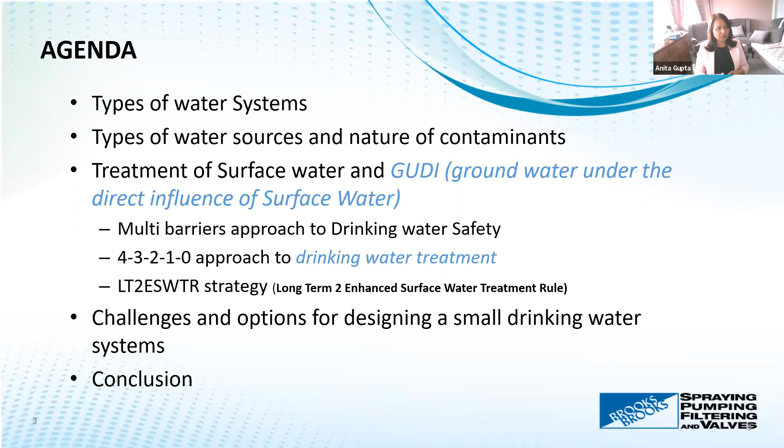And this long word, LT2ESWTR, the full form is Long Term 2 Enhanced Surface Water Treatment Rule. Canada has adopted that from US EPA guidelines. And then of course, we'll talk about what challenges we run into when we're designing a small drinking water system. And at the end, as Paul promised, there will be questions and answers.

Now, looking at the type of water systems. This definition of water system could be different depending on what municipality, what jurisdiction you are in, but following are the broad categories of different water systems based on size. And this is the definition by our federal government for First Nations communities.

A large system is a system that serves over 5,000 people, so it's a large city. A small system is about 500 to 5,000 people. That's called a small system. Very small system is when you're looking at 26 to 500 people, and then 25 or fewer people is a microsystem. Irrespective of the size of the system, the water quality expectations are the same. Safe drinking water quality.

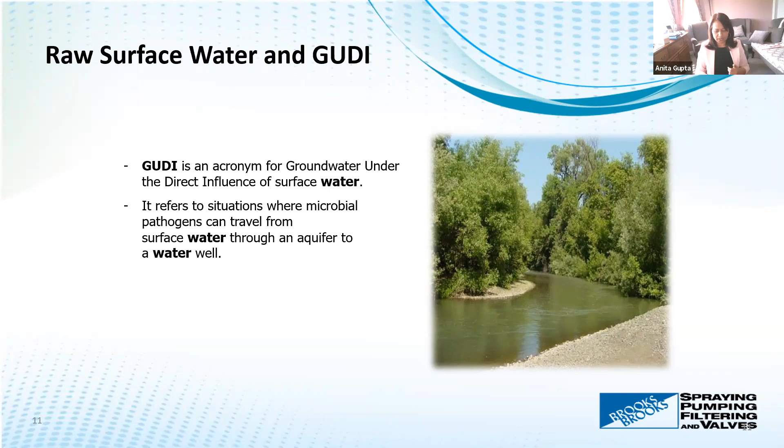So the new term was groundwater under the direct influence. A groundwater that has an influence of surface water will have some characteristics of surface water as well as groundwater. So let's take a look at it. What are those contaminants in there? A raw water and a groundwater under the direct influence.

So what will be a typical water analysis? Or I should say what we will be looking for when we are designing a small treatment plant using surface water. We will be looking at what the incoming turbidity is, what the total suspended solids, TSS load is. We know that if it's truly a surface water, dissolved solids will be relatively less, about 300 to 1,000 parts per million, because the dissolved solids are pretty high in groundwater, in well water.

That's where you get the high calcium, the water hardness. That gives you all those dissolved, high chlorides, high sodiums. That causes your dissolved solids. Same way in surface water, the hardness will be moderate and low level of iron and manganese. We know that the iron and manganese issue is more in the well water, in the groundwater.

The biggest issue with any surface water is going to be high organic content. Total organic carbon, TOC. Dissolved organic carbon, that's one of the biggest challenges that we run into when your water intake source is surface water. And now what are the challenges with GUDI water, which is groundwater under the direct influence? The TSS level will be relatively low because you're mainly getting the water from the ground.

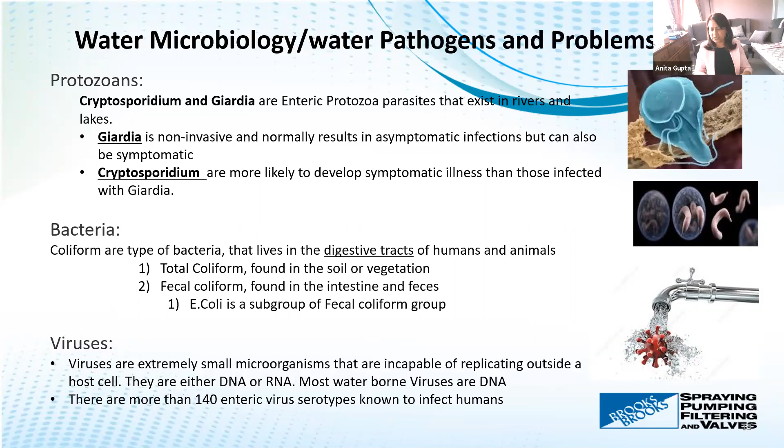Okay, so what are the symptoms of crypto and Giardia, which are protozoans? What are the symptoms if the infection is because of the coliform, and the symptoms of viruses? Now, crypto and Giardia have very similar symptoms: nausea, diarrhea, low-grade fever, uneasiness. Coliform, again, the diarrhea, abdominal cramp. These are very typical symptoms.

Same thing with viruses. If the viruses are not removed, they get into our digestive system, in our intestine. It could cause gastrointestinal illness. And in serious cases, it will actually cause diseases like meningitis and polio. Right?

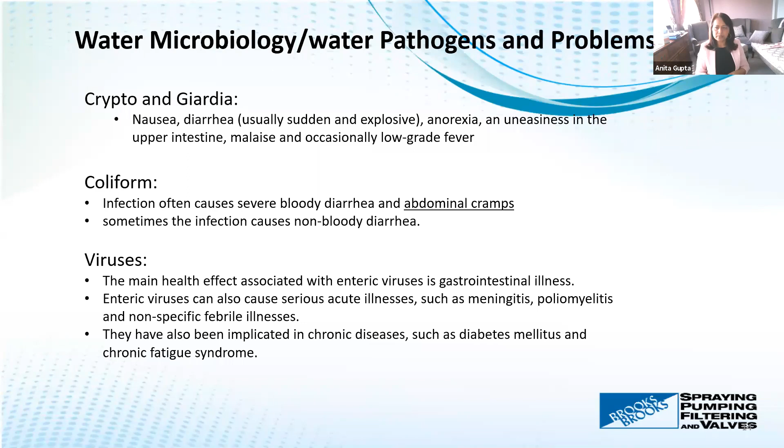Now, getting to how we're making the safe water. Before we get into the treatment, let's look at the water safety approach, which is adopted across North America, and actually the World Health Organization also recommends this approach. It's called the multi-barrier approach. What is a multi-barrier approach?

It's not just that treatment has to be robust. We need to first protect the water source. If we have picked Lake Ontario or the Columbia River in BC or somewhere where we're taking the water, we have to protect that. We can't keep continuously adding more contaminants to it. That means your water quality will keep changing. And then, of course, the robust water treatment system design is important.

At the same time, in the multi-barrier approach, it's important that we do continuous inspection, right? That means we need to continue to inspect: is the turbidity level that's coming out good for human consumption? All the viruses and bacteria, are they up to the level of the quality of drinking water? Continuous testing is important. A distribution system has to be robust. There are guidelines for how much residual chlorine or disinfectant needs to be there. So a multi-barrier approach is another guideline to make sure we design a robust water treatment system and maintain it.

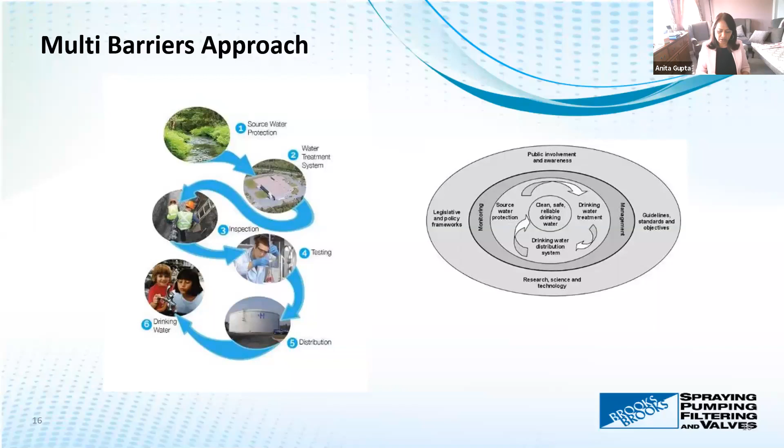Again, the same thing I talked about in the previous slide: we need to protect the source. We need to design a robust water treatment system. We have to secure a good water supply network, and a monitoring program for water quality so that it can be adjusted, right? And always be prepared if some adverse conditions come up.

This big word again, Long Term 2 Enhanced Surface Water Treatment Rule. This has been adopted from EPA guidelines. What is it? This was adopted to give guidelines for pathogen reduction. So which pathogens? Mainly, it addresses the health effects of Cryptosporidium in surface water systems when used for drinking water.

So the guidelines are, before we say this water is good for treatment, or what type of treatment needs to be advised, we need to collect the water sample, right? We need to test it for crypto. We need to test it for E. coli, and then design a disinfection and treatment system to make sure it meets the benchmark. The Canadian Drinking Water Agency adopts these guidelines, and I would say most municipalities across Canada go by these strategies.

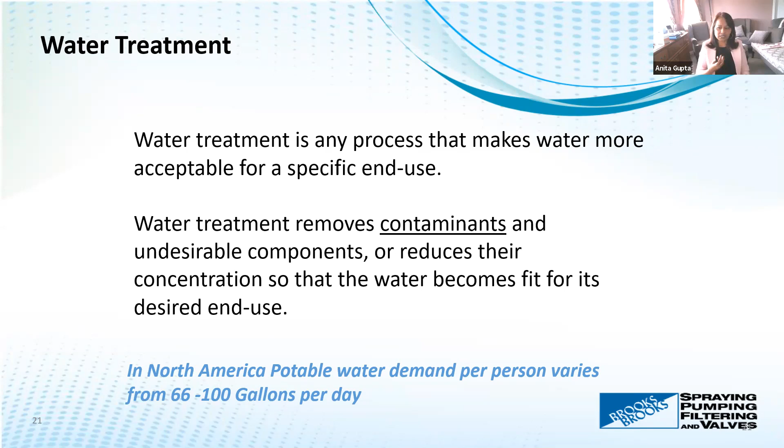Now, what's the best approach to treatment? It's like a formula, you can consider it: the 4-3-2-1-0 formula. Think about it when designing a potable water system. What does 4 mean? The 4 means viruses need to be reduced or deactivated. Whatever viruses come into the surface water, by the time this water is called drinking water, it should have 99.99% reduction of viruses. That gives a 4 log reduction or 4 log credit.

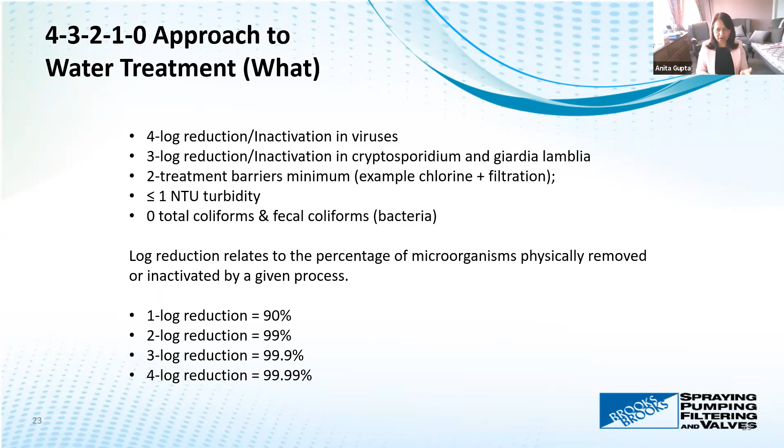Crypto and Giardia down to 3 log credit. And 2 means a system should have 2 treatments minimum. When I say treatment, one treatment can be a filter, the other can be chlorine. And the turbidity of the treated, filtered water, the water you're calling potable, has to be less than 1 NTU. When it comes to coliform, zero, absolutely no coliform should be there. Remember, coliform is bacteria. Viruses are the smallest microorganisms, and Crypto and Giardia are protozoans.

Now, what are the different approaches? How can you get 4-log reduction? You can get it by using filtration and disinfection. For filtration, there are guidelines. The filter needs to be NSF 61, or NSF 53 if it's point of use. The filter should have a log credit certification. A filter can be cartridge type, multimedia sand filters, or ultrafiltration. And for disinfection, you could use chlorination, UV, or chlorination and UV.

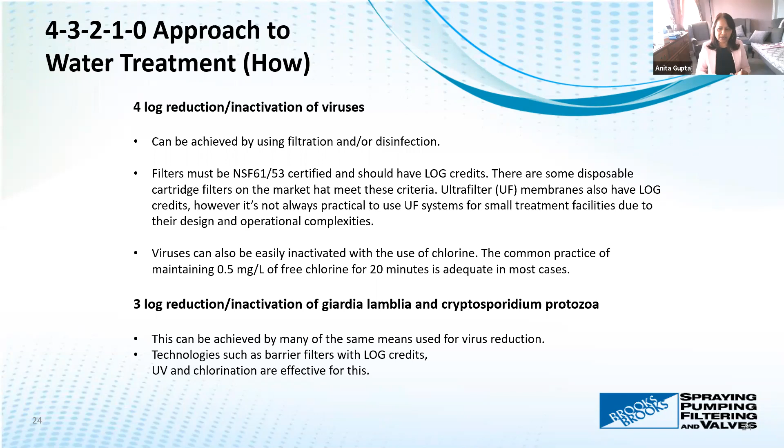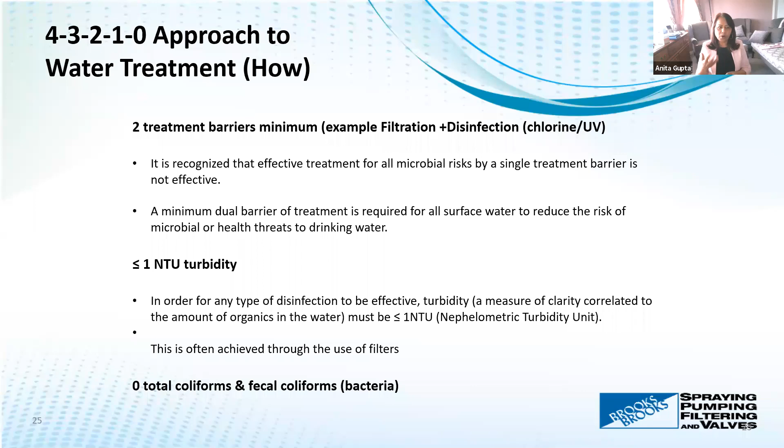We'll go into a bit more detail in the next couple of slides. There are guidelines on what the residual chlorine level needs to be and how long this residual has to be there. Same thing for 3-log reduction for Giardia and Crypto: you could achieve that by disinfection as well as filtration. 2 treatment barriers, simple. 1 NTU turbidity: barrier filters. A filter is the only, I would say, foolproof way to make sure the turbidity is less than 1, unless the incoming water already has less than 1 NTU, which is very rare if you're using surface water from a lake, river, pond, or groundwater.

Now, we can use filters, we can use disinfection. What challenges do we run into when designing? Many challenges. The very first one is source water quality data. We have river water coming in. Do we have reliable water quality data? Do we know exactly what TSS, total suspended solids, or turbidity will be there throughout the year? We know it's going to change depending on rain and the time of year, same with how much TOC will be there. All that data needs to be very reliable. That's why it's important to do testing multiple times a year.

But at the end, we need to meet the treated water guidelines. That means turbidity needs to be less than 1. With the existing treatment, if any, TOC needs to be brought down to 3 to 5. Color needs to be brought down to 3 to 5 ppm. And if it's groundwater under the influence, we have to make sure iron is brought down to 0.3 ppm or less and manganese to 0.05 ppm or less.

Before we get into barrier filters, since we're talking about surface water or groundwater under the influence, let's look at pre-treatment. If you have high TOC, we need pre-treatment, because otherwise it's going to cause havoc for the downstream filters and disinfection. TOC, organic carbon, or slime-producing bacteria are common issues upstream. Chlorination and enhanced coagulation and flocculation are different ways to deal with it.

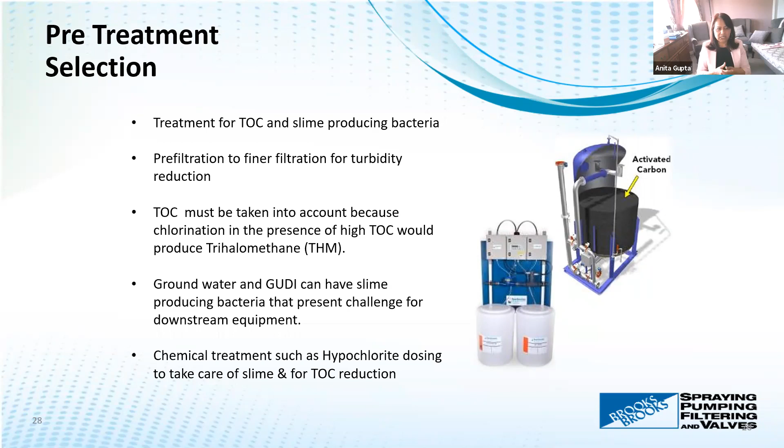We have to be very careful if we add chlorine in the presence of TOC. If the organics are not taken care of, the chlorine will react with them and produce disinfection byproducts such as trihalomethanes, which are carcinogenic. So all that needs to be thought about and taken care of before we get into filtration and final disinfection.

Another type of pre-treatment or pre-filtration need is a coarse filter you might want to put in so that your final barrier filter, which gives you less than 1 NTU, is protected, and you're not constantly changing your filter media, filter cartridges, or membranes.

Now, final barrier filters. Final barrier filters, especially when it comes to small treatment plants, could be a cartridge, or it could be membranes. It could also be pressurized sand filters, multimedia filters. But the bottom line is this filter should be able to give us less than 1 NTU of turbidity.

So the guidelines say your filter needs to be 1 micron absolute. More importantly, it's important that the filter is 1 micron absolute and membrane filters. The difference between a regular 1 micron absolute filter and membrane is the membranes have the credit for microbial reduction, and a regular 1 micron absolute filter is certified only for particle reduction. So just a minor difference in there.

When it comes to water filtration, drinking water, I would stick more with the 1 micron membrane filters. But for even finer filtration, there are the ultrafiltration membranes. But at the end, it needs to meet NSF 61/53 certification.

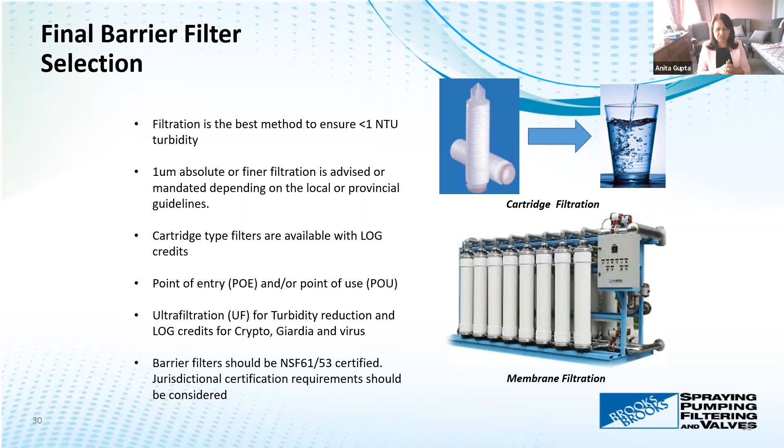Cartridge type filters. There are so many different cartridge type filters. But when we're designing a system using cartridge type filters, we're going to be aware of what type of challenges we may run into, what are the limitations of cartridge type filters. We know that it's going to get plugged. Once it's all full with dirt, we need to change it, throw it out, and put a new one. That could be challenging, depending on who's operating the plant. What are the plant requirements, right?

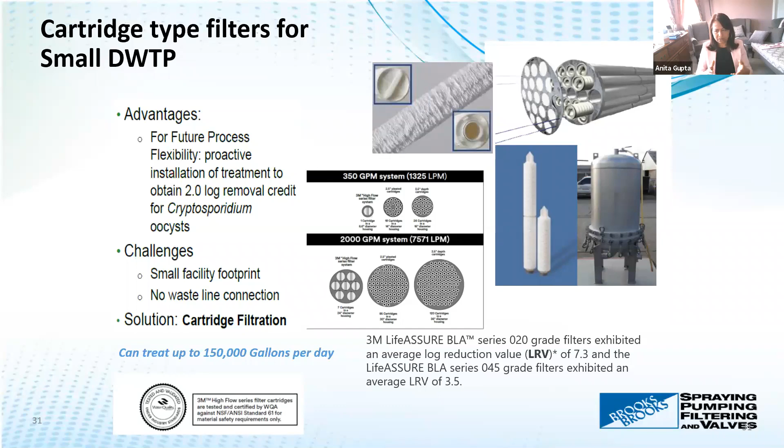And also, not all cartridge filters have the log credit. You may not get any credit for reduction of crypto and Giardia or any viruses or bacteria. These are some examples of cartridges out there which have some log credit associated. 3M LifeAssure BLA model, 0.2 grade has the log credit associated. And same way, they have 1 micron high flow cartridges, which are NSF 61 certified. However, it does not have any log credit associated with it. Just that option is out there.

A separate seminar could be done on how to design a system with ultrafiltration. And of course, we don't have time today to talk about that. But next time, if anybody's interested, I'll be more than happy to talk about it.

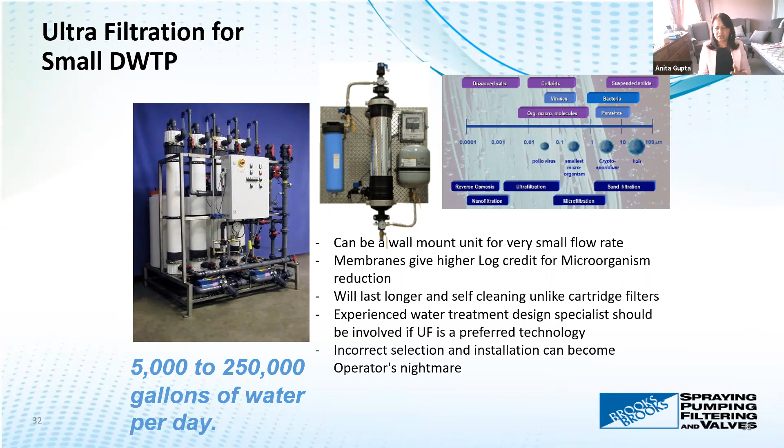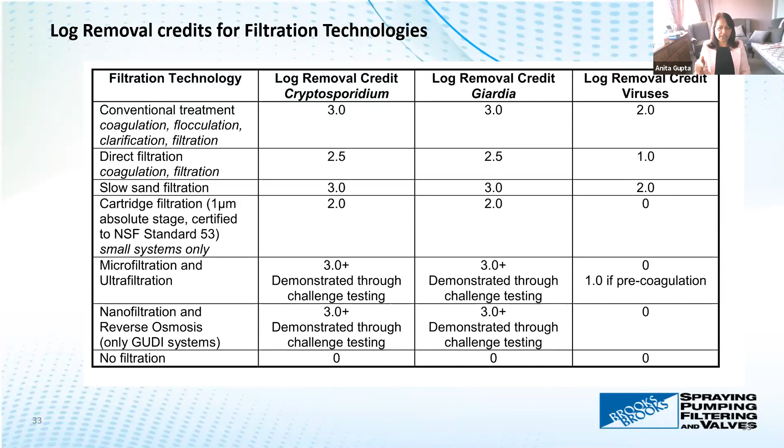Now, we've been talking about the credits and log removals. The Canadian Drinking Water Guidelines say that if you're using conventional treatment with coagulation, flocculation, and then filtration, you get 3 log credit for Cryptosporidium, 3 for Giardia, but only 2 for viruses. And if you remember, we need to get to 4 log credit for viruses, 3 for crypto and Giardia. So with ultrafiltration, we get 3+ for crypto, 3+ for Giardia. If pre-coagulated, you get 0, you get 1. Otherwise, you've got to have some other disinfection to make sure you get virus removal.

Going back to the LT2ESWTR strategy, because it assigns the log credit to certain types of filters. A filter manufacturer can also get log credit for their membranes or cartridges by doing a third-party demonstration pilot test. Actually, about 2 or 3 years ago, we were working with a campsite small water treatment package where we used BLA series 1 micron membrane cartridges and got the third-party testing done and the log credit associated with that. So it is possible.

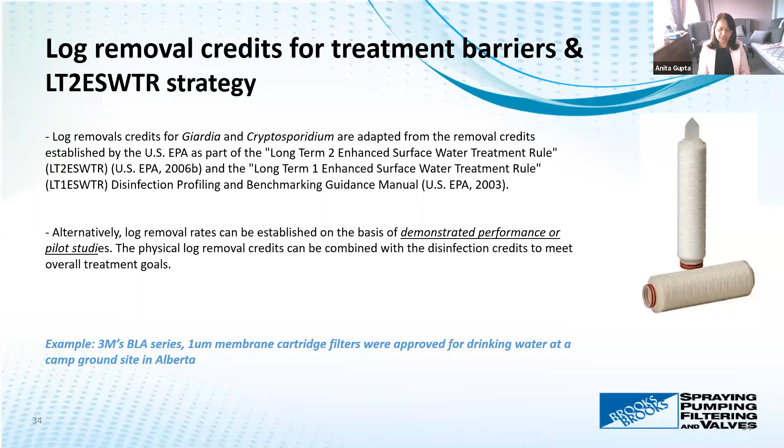So this was about the designing of barrier filters. You could use membranes, you could use cartridges. And now disinfection systems, because the filter system doesn't give you all 4 log credit. So let's look at what disinfection system.

There are a couple of different types of disinfectant out there that have been talked about, and numbers of articles written on them. The most commonly used ones across the world are chlorine, ozone, chloramine, chlorine dioxide, and UV radiation. The most popular ones in Canada are chlorine and UV. Ozone is becoming more popular.

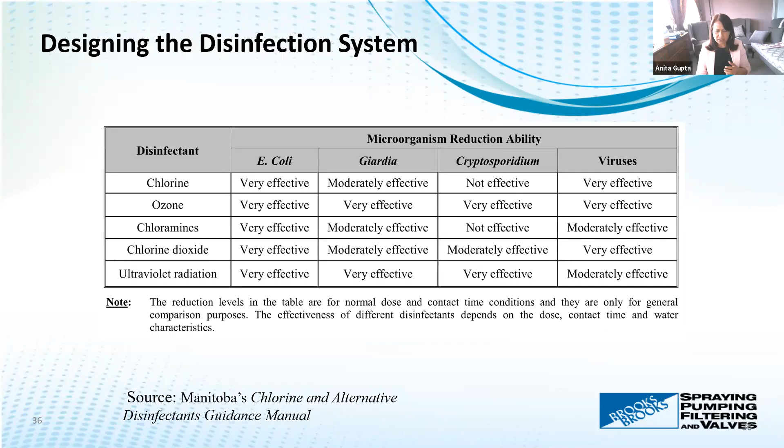It's very effective, but at the same time, they all have some challenges, limitations and advantages in terms of the retention time and residual time. Chlorine is supposed to be a little bit safer, as I show in the next slide. If you look at chlorine, it's good for equipment reliability. The safety concern is relatively low because we could use hypochlorite, which is pretty much your common bleach. And chlorine is actually very effective for virus reduction as well.

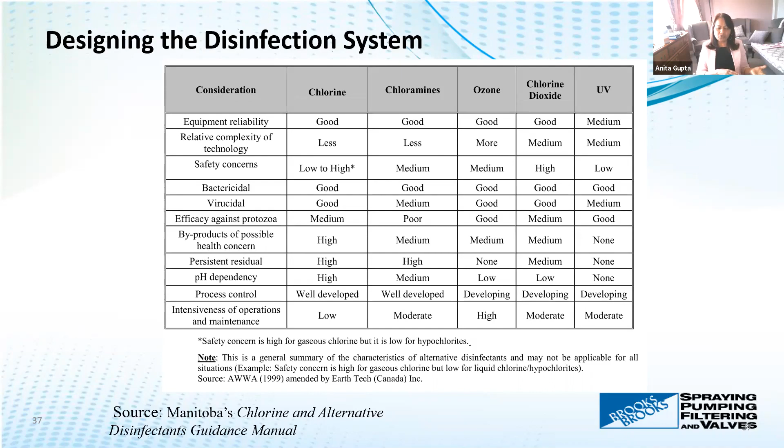But it doesn't mean that we can't use other ones. Mostly what I have seen personally in Canada is a combination of two disinfectants, UV and chlorine. Large treatment plants have their on-site production of chlorine dioxide or chlorine. But two disinfectants are very common. So if you're using UV, then chlorine becomes your secondary disinfection.

When you're designing this, first we need to figure out, are we using UV or chlorination or both or something else? Let's say we're using chlorination at some point. Remember, a few slides back, we need to make sure that TOC has been taken care of upstream of it. If it hasn't been and TOC has reached the end, we may run into production of trihalomethane, which is a disinfection byproduct.

And also, when we're designing the chlorination system, we need to be careful how we're designing the contact time and what concentration of hypochlorite chlorine we're using. So somebody who has done this before needs to be consulted about it. The other challenge we run into using chlorine is chlorine escape, or maintaining the residual chlorine. There are guidelines of about 0.5 to 1 ppm of residual chlorine to call this water safe all the time.

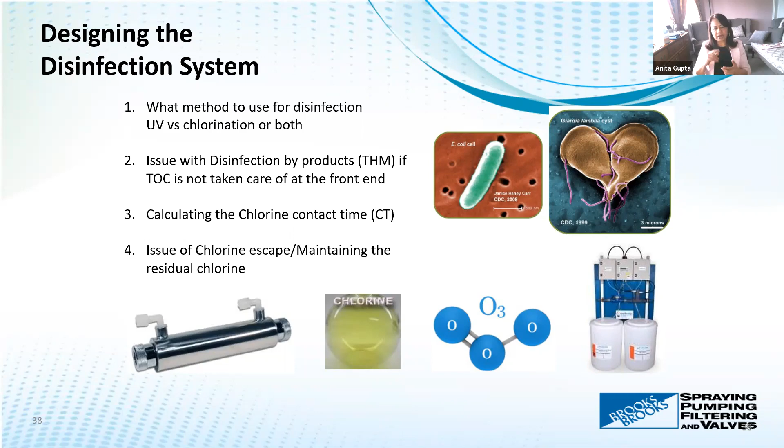Actually, we had an issue with a plant where the plant was shut down over the weekend and somebody comes on Monday and there's no residual chlorine left in there. So there is a way around it. We need to have a recirc pump going so that the chlorine is recirculated all the time.

UV disinfection. Go back to high school physics: the UV spectrum is higher in frequency than visible light and lower than X-ray. So UV radiation actually alters the DNA of microorganisms. It can alter the DNA of crypto and Giardia and bacteria and even viruses. So that's why UV is very effective in deactivating. It's deactivating, it's not killing. The filter is removing and UV is deactivating it.

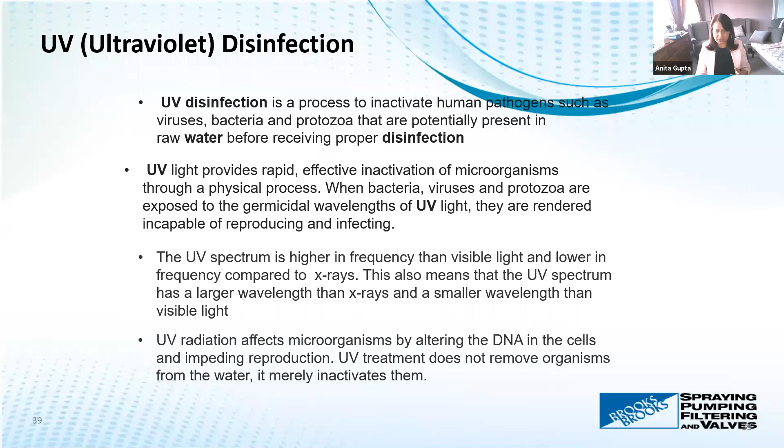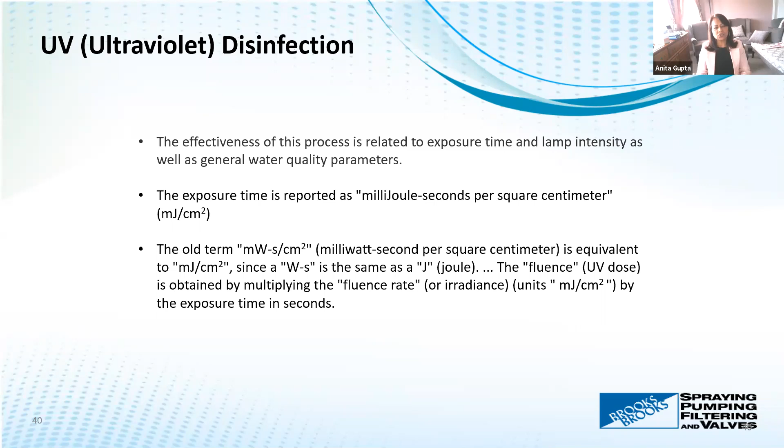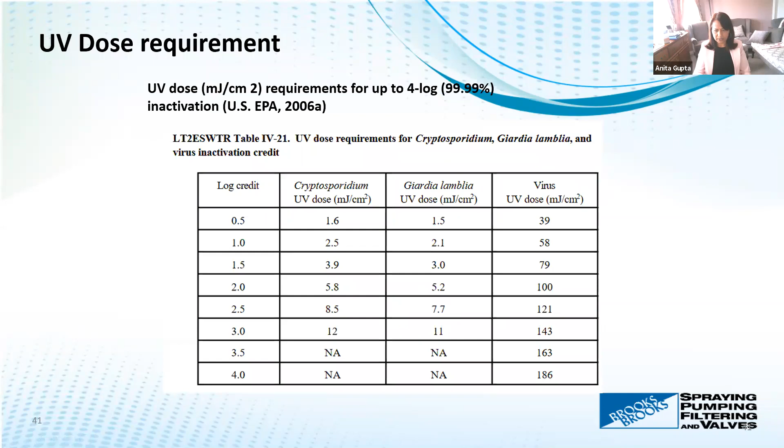Same is with chlorination. How effective is UV? Again, similar to chlorination, it depends on the exposure time and the intensity. Millijoules per square centimeter is the unit of measure for determining how much strength you need to expose to. We don't need to go over the detail of this table, but if you look at it, if we need a 4 log credit for virus removal, we need to subject it to 186.

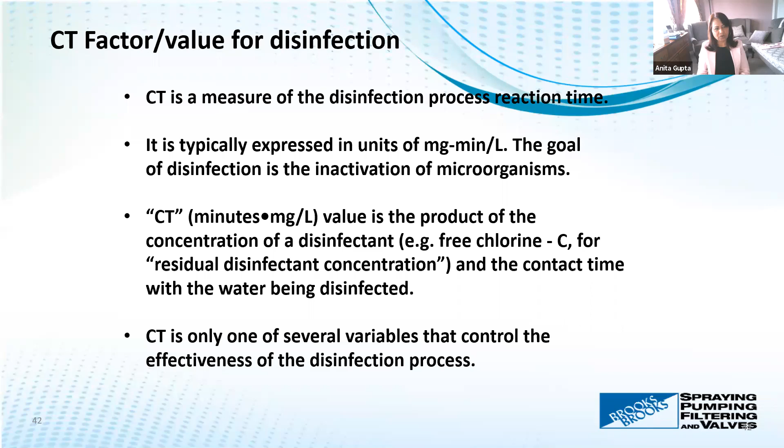CT factor in chlorination. CT, as I mentioned earlier, is a measure of the disinfection process and reaction time. It's the concentration of chlorine and how long it's in contact. Once we know how much free chlorine or residual chlorine we want in the water, the back calculations are done and the retention time is figured out. After that, we figure out how big our contact tank needs to be, or what the design needs to be. That itself is a topic to figure out how to design a contact tank for chlorine disinfection.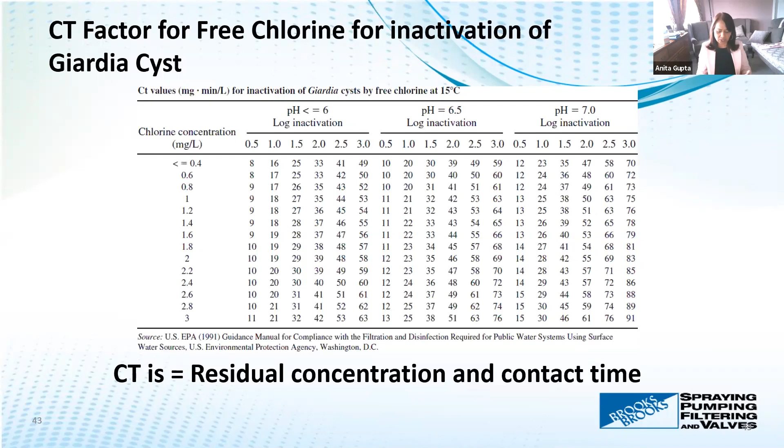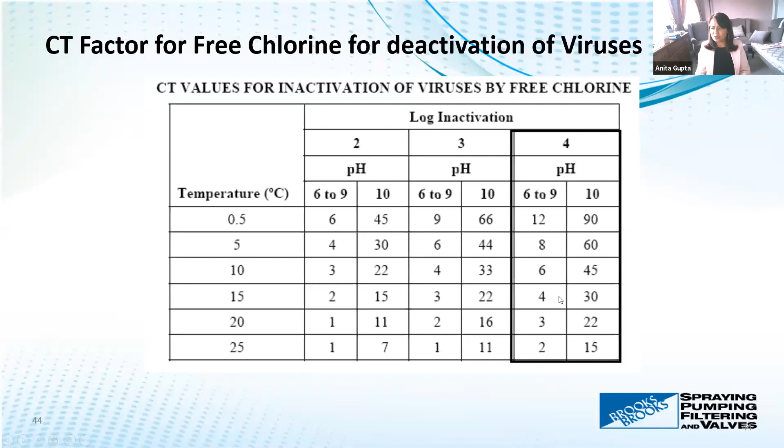These tables are pretty simple and easy to understand, and they help in designing our chlorine disinfection system. Same thing, the CT values are out there for deactivation of viruses. Going back to the formula of 4-3-2-1-0, we know that we need 4 log inactivation. Let's say it's a pH of 6 to 9, and we're operating at a temperature of 15. We need a CT value of 4.

I don't want to stop without talking about water disinfection and the COVID-19 virus. I have to say that I'm not an expert in that; I've been reading like everybody else. It is pretty bad. It's a virus, it's airborne. Can this get into our water stream? The answer so far by different research is yes, it could get into the water stream.

But can this be deactivated by using the same method that we have been using before? So far, the answers that have been found is yes, it could be deactivated. We don't need to change anything. Has this been found in wastewater? At this point, not as much, because most of the patients are either in the hospital or in a particular

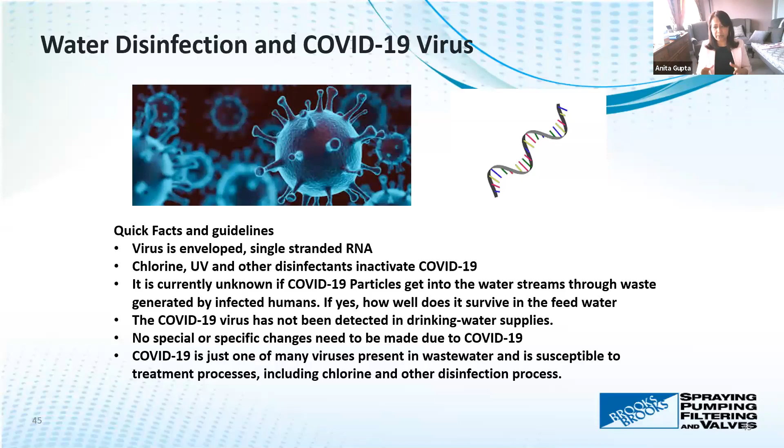area. The biggest difference between common waterborne viruses versus this virus is this is a single strand, just an RNA, versus the other viruses, most of them are DNA. However, our regular chlorination will work for that so far. Again, things might change because this is evolving every day.

Before we go to the questions and answers, I just wanted to show you a couple of the packages and some of the challenges we ran into. This is the package we supplied, I think about 4 or 5 years ago, for a hydro project. If you look at the different components, these 2 green bodies at the bottom are 2 pre-filters, filtering, I believe, down to 100 or 150 micron to get big chunks out.

And these 2 shiny cylinders up there had the 1 micron membrane cartridges. This was able to bring our turbidity down to less than 1 NTU. And this green box in the right top corner is a UV. This has the UV bulb, UV disinfection, and after that there was chlorination.

So the challenges we had: because this plant was not running 24 hours, when the water was left in the tank, chlorine escape was happening by the next day. Residual chlorine wasn't showing what we wanted it to be.

Since this was surface water, there were some challenges of cartridges getting plugged too quickly because the water had some organics in there. And I believe, I don't know exactly, that we moved the chlorination system to the very front end so that we can take care of organic issues as well as the disinfection part.

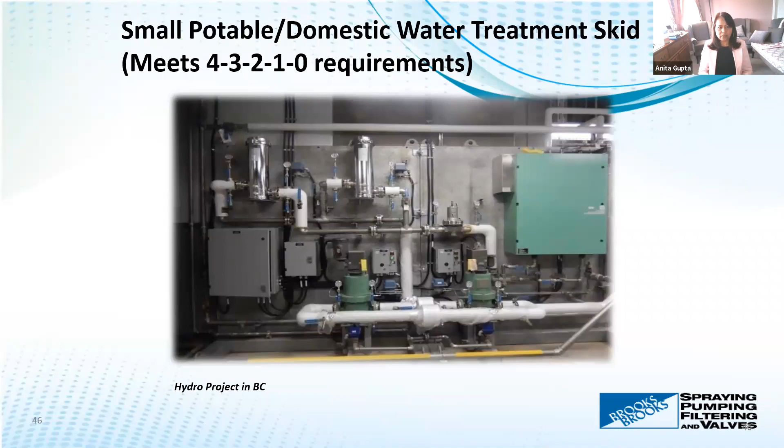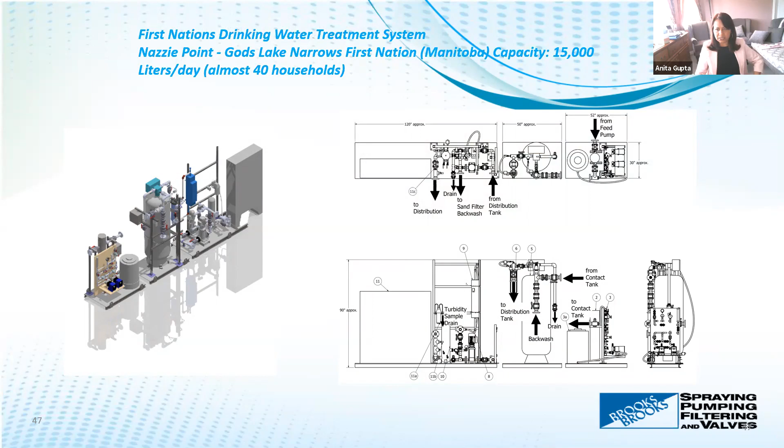And not too long ago, we built a package for a First Nations community in Manitoba. This was for 15,000 liters per day, almost like 40 households. This looks a little bit complicated. This was shipped in 3 different skids. I'm going to actually show you the P&ID on that. So this was surface water, and of course it met all 4-3-2-1-0 requirements.

We had surface water coming in using a pump. We went through a coarse screen, and then into sand filters. This is a barrier filter. And then the next stage was cartridge filters. Why 5 micron, why not 1 micron? This was done with what was more convenient for the customer, because at the end we did put 0.6 micron, because to meet the 4-3-2-1-0 requirement, the cartridge or filter needs to be finer than 1 micron absolute.

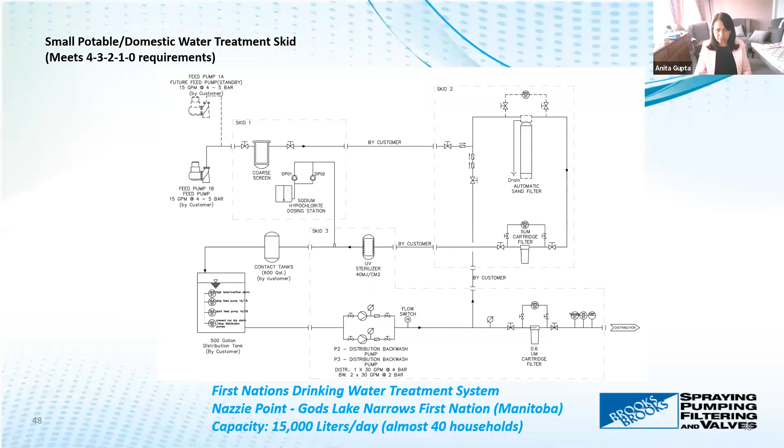So we had the pre-filtration, the barrier filter here, the first stage of disinfection, which was UV, and also chlorination as the secondary disinfection at the contact tank. And then it gets into the distribution system. This is up and running there. So this pretty much summarizes it.

Before I open the polls for questions and answers, I just wanted to summarize that when we get into designing a potable water system, the most important point to consider is, yes, it's important to meet the water quality guidelines. However, the system needs to be robust. We need to use a multi-barrier approach. The system needs to be able to deal with the variables and take care of unexpected operating situations.

That's really important. And also, we need to take into account the different treatment technologies out there. Can we use cartridges? Can we use membranes? If we're using membranes, we need to make sure that we consult with the individuals, companies, and organizations who have experience in designing it, because that could be really mind-boggling if it hasn't been done properly.

So it's really important that we get those people involved, because all these guidelines and laws are made to educate us, to protect us, to tell us that water quality is really important, because potable water is the water that we're taking into our body. And we want to make sure that no unwanted pathogens get in there, and the turbidity needs to be very low.

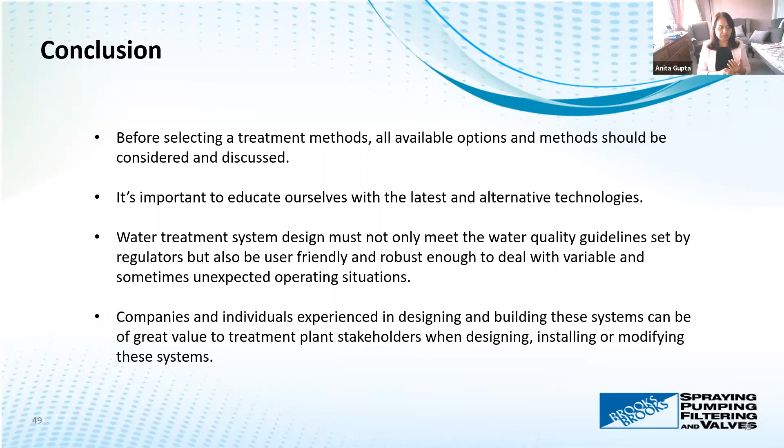Paul, do we have any? Oh, there is a... yes, so there is actually one question here. It said, do you regularly test for non-coliform bacteria? If so, how do you handle a high non-coliform count when total and fecal coliform are? Sorry, let me read it again. Do you regularly test for non-coliform bacteria? If so, how do you handle a high non-coliform count when total and fecal coliform?

Well, to my understanding, if you have a high non-coliform count, the concern with the guidelines is more directed toward coliform count, if your total and fecal coliform is 0. But I'm not exactly sure if the guidelines suggest that you should still test for non-coliform bacteria. However, the guidelines say you should regularly test for coliform bacteria. I don't know if that answers the question. It was an anonymous attendee.